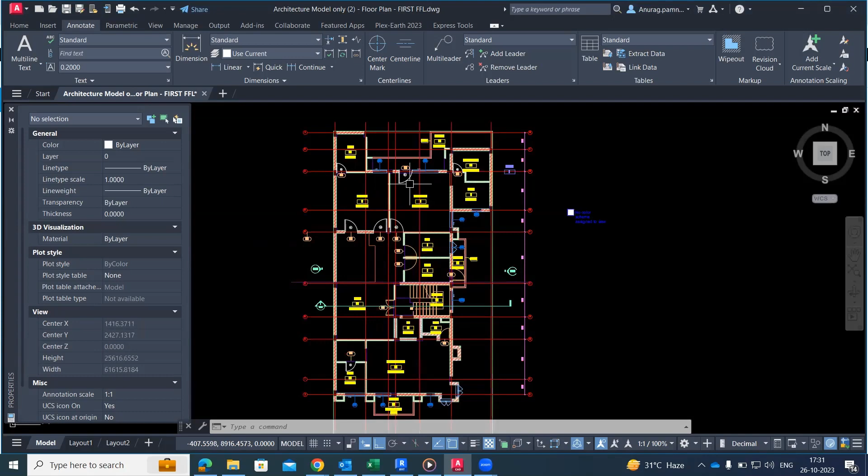But in case you need to fetch out the information with respect to a particular floor plan, you will be creating different files of first floor, second floor, third floor, and so on. And then you can take out how many of a particular door type are located on the particular floor levels. Right now we are not going into the details of those, but we will see how to take out the information of this particular floor plan with respect to this door type D1.

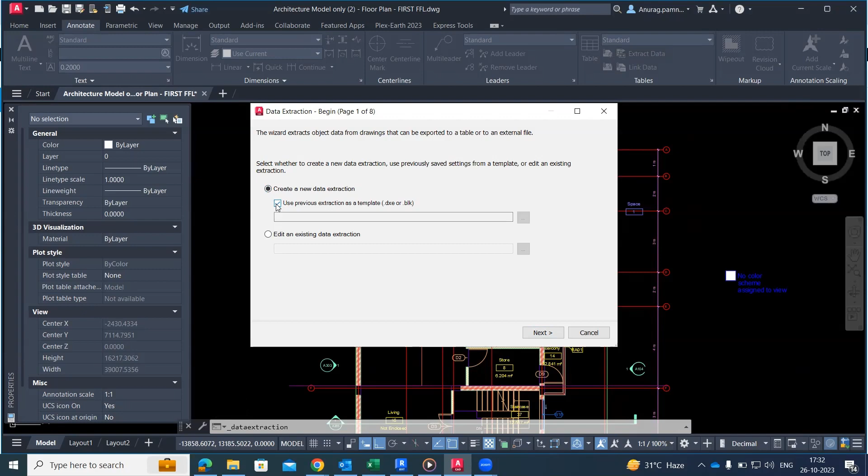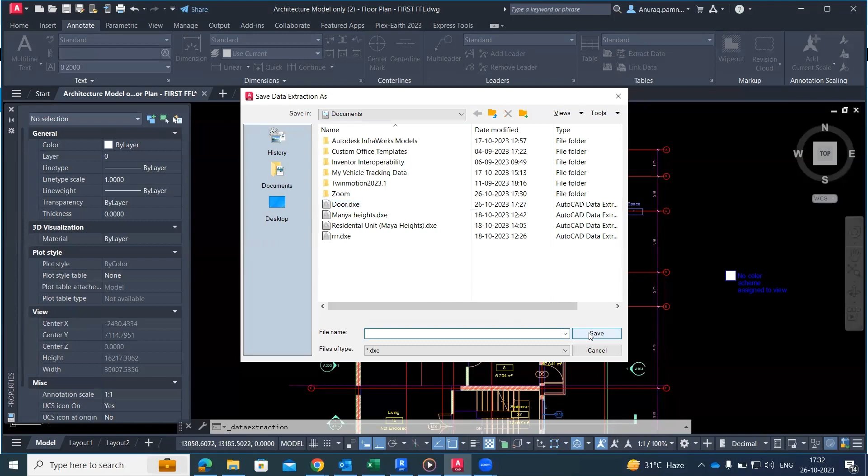Okay. So again, the same procedure, go on to the extract data and choose a new template. Say I was having a previous one with the name door. So I would be using that itself again. We'll browse it. We'll choose this door DXE. So you can have a particular folder of a project under which you can have the multiple folders of doors, windows, areas, and so on. So I will say open. I will go on next. I will say door itself, and yes, I have to replace that.

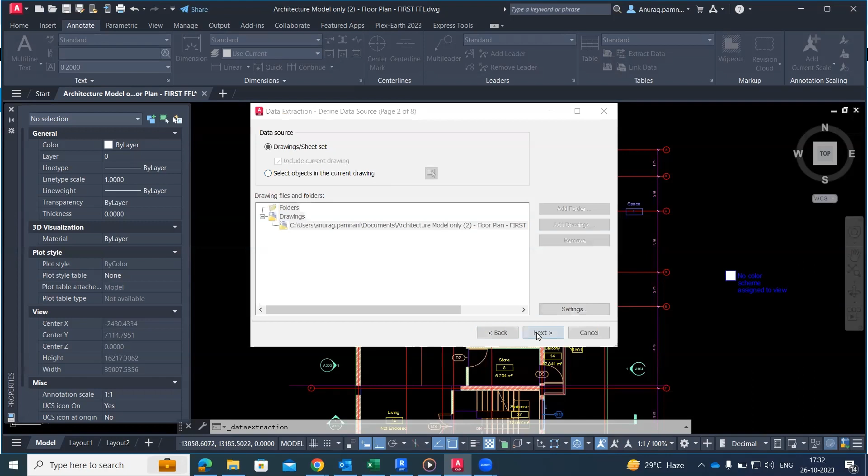Okay. So in the previous part, we have seen in a current drawing, if I have selected that door, it will count it as one, but it won't give me how many blocks of the same type are present over there. So I would be going on next this time. And over here, it says display all objects. I will uncheck it. So it gives me the particular block type. And if I remember, it's door 01. So here is the check quantity. I will check it. And this should be on display objects currently in use only. This is also very important to check.

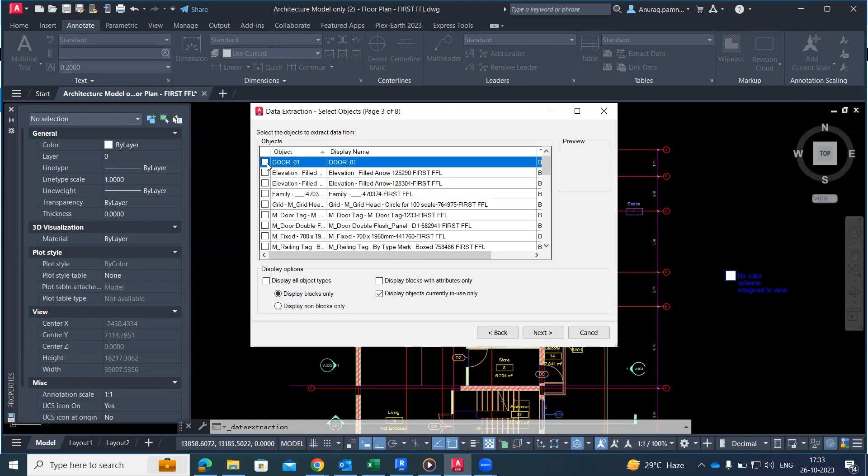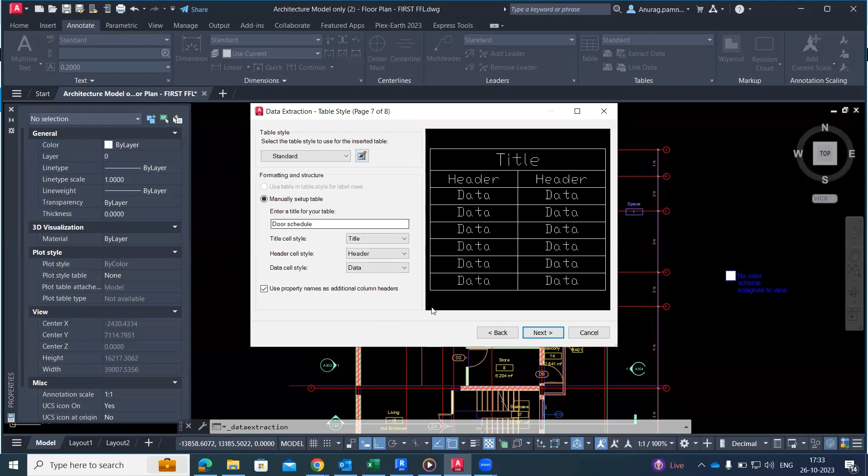And then we need just door 01. So I will right click on it, invert the selection, choose door 01. Next. And over here, the attributes are given and I will check yes. Now you can see a total number of count in the drawing of a particular door type. Door 01 is number 7. Going on next, we need to insert the data. I will name it as door schedule. Next, finish. And now you can see that 7 counts are present of door 01, which is of type D1 with its attributes mentioned on the table. So this is how we fetch out the data, and this also is helpful in calculating the cost.

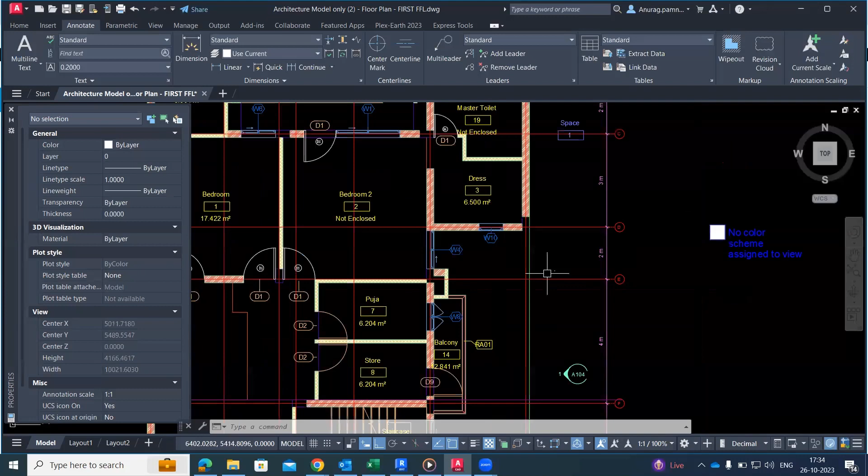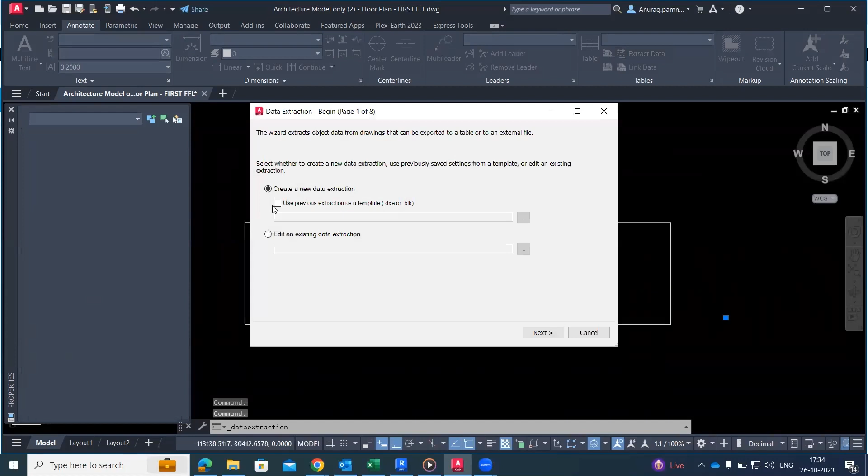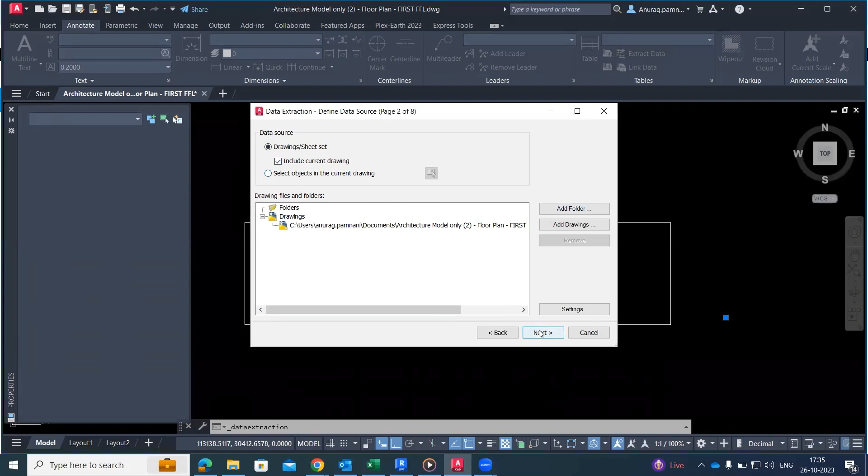Just for an example, I have this other door type over here, and you can see on the property it has the name single line door, which is also a block, but it has certain other attributes which are associated with its cost. And I have 5 of the doors over here. I will go back again onto the data extraction, same thing: select the previous template, DXE, open it, next, and again you have to replace it. Same procedure, going on to the next option. Single line door, right? It was a block.

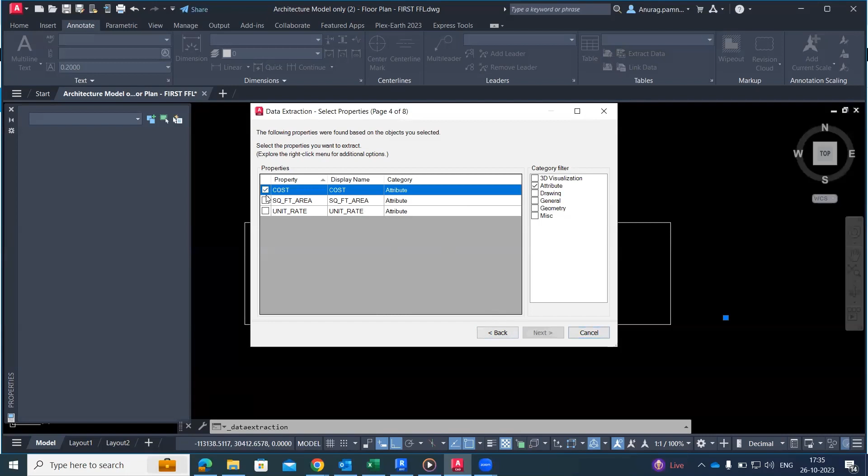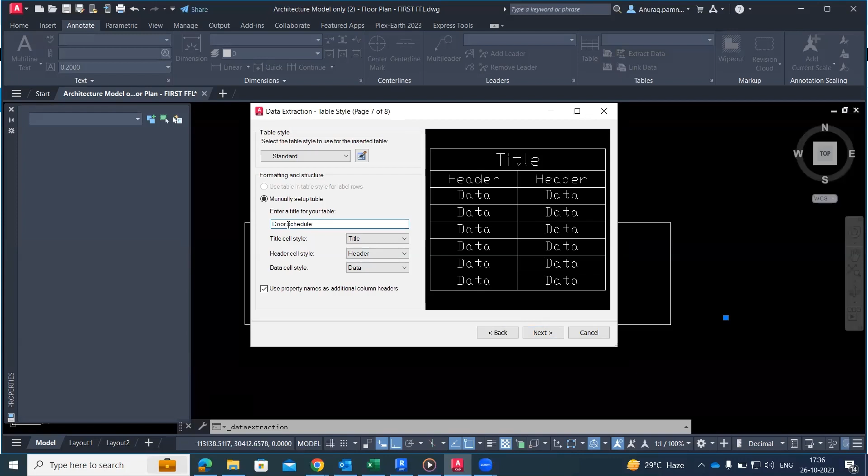I have to see which door it was. Yeah, over here, single line door. So I can check on this and I have to uncheck this. Go on next. These are the parameters with their associated attributes. I will just go on to all three. Next. Now you can see there are 5 counts of single line door. Cost is not mentioned, but the per unit rate of a door and the square foot area that the door covers are mentioned as attributes. I will do next and insert a table again. Say door cost schedule. Just for an instance, I'm giving it a name. Next and then finish.

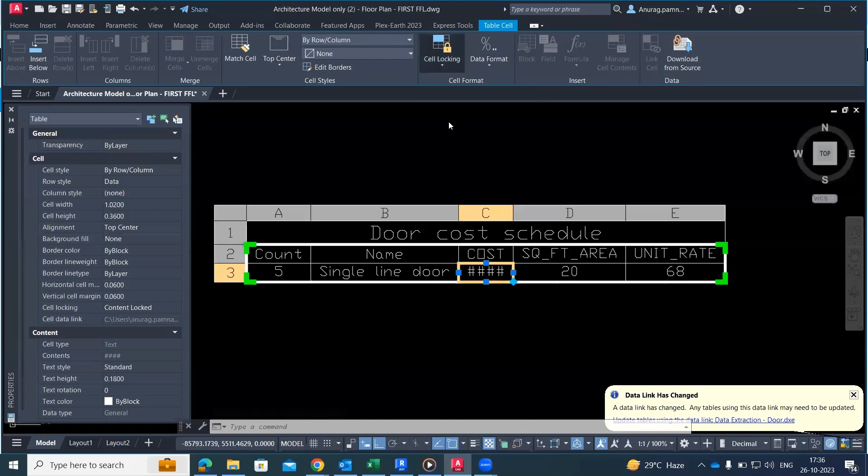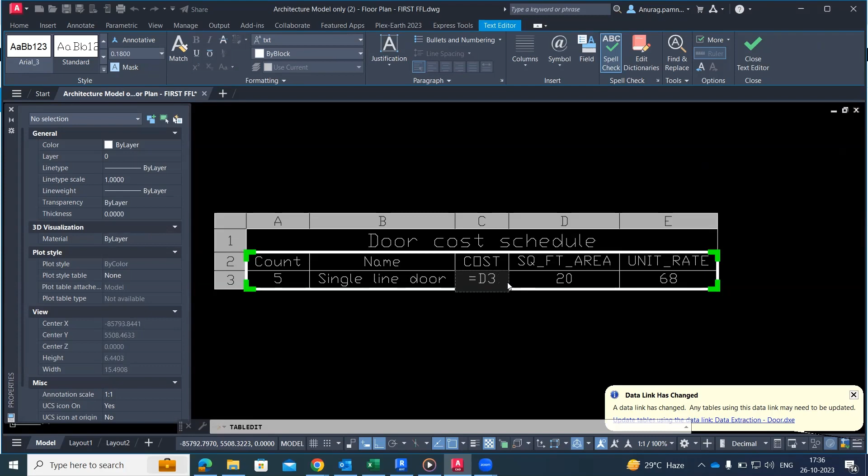Now you can see there is a table available to us. I don't know the cost, but it's helpful in calculating the cost as well. I will say cell unlock, and this will help me in editing a particular cell. So this becomes the cost and I can apply a formula to it: equals D3 multiplied by E3, enter. So now you can see 1360 is my cost. So this is how it is useful in getting the quantity and estimations for a project, and helps us get a near quantity and estimation for the particular objects in the drawing.